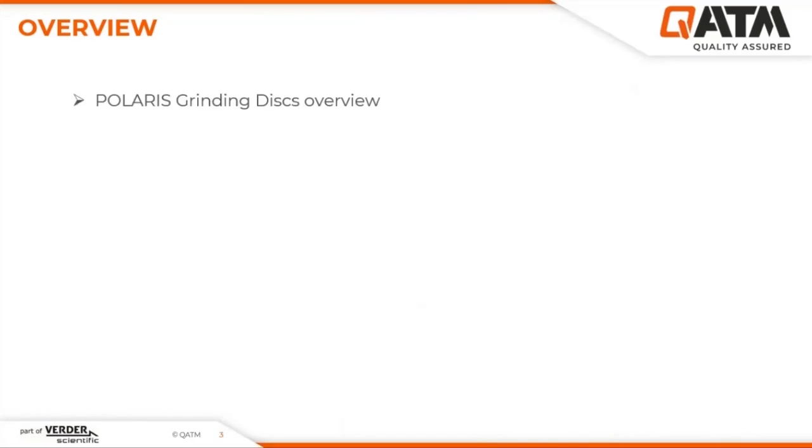After a short overview, I will talk about the Polaris grinding disks in more detail, about the composition, properties, and the application of the Polaris grinding disks. Afterwards, I will show you results of a case study and two preparation examples that we did in our ATM lab with the Polaris disks. And at the end, you will be given a short summary.

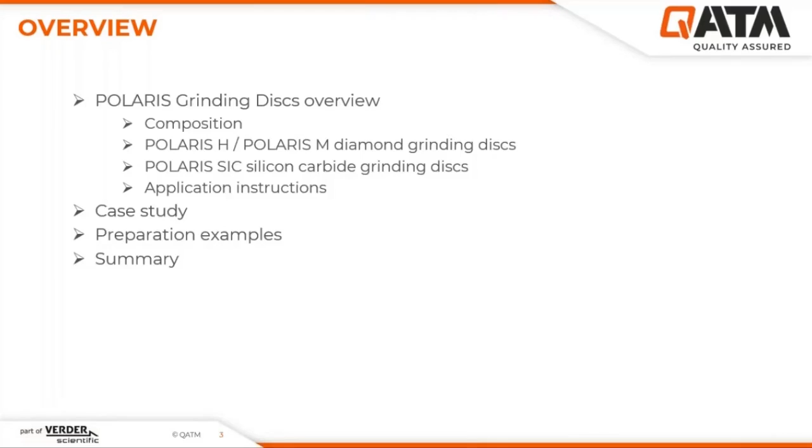As you know, we as new QATM are formed of the former companies ATM, located in Mammelzen, Germany, and QNESS, located in Golling, Austria, now acting together forming one company, QATM. That means that our product portfolio has also merged together.

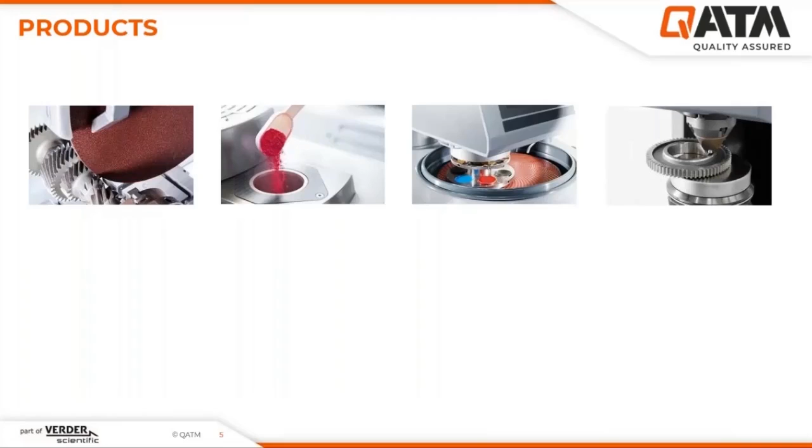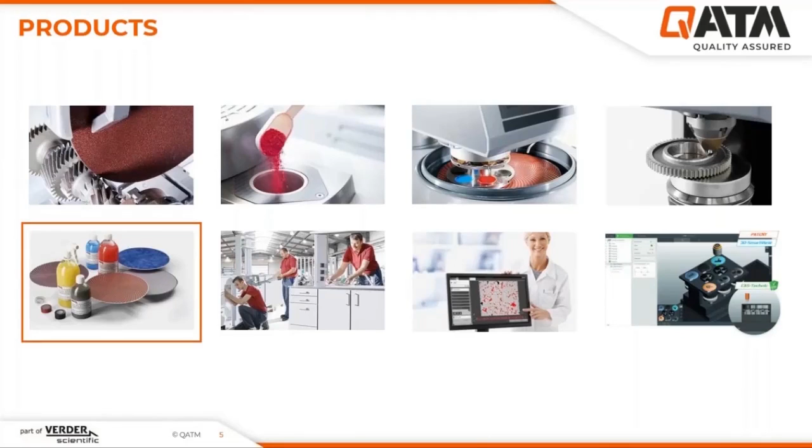Besides the machines for sectioning, mounting, grinding, and polishing, the hardness testers have been added. Then we have the consumables for all areas, lab furniture, and software for analysis. Now we will be looking at the grinding disc, which belongs to the grinding consumables.

I think most of you already know about the new grinding discs, and many of you have already had an introduction or have been working with some of them. So now there is a broad variety of grinding discs available for a broad variety of different materials.

One of the big advantages that grinding discs have compared to, for example, grinding paper is the rigid steel carrier, which allows the production of very flat samples with high edge sharpness. Additionally, no extra tools are needed to attach the grinding tool onto the working wheel. The high service life of the discs leads to a more environmentally friendly preparation method, since less waste is produced compared to grinding paper.

Today we will only talk about Polaris SiC, M, and H. These three discs have the same design but different properties. In principle, they differ in two things: abrasive and bonding.

Polaris M and H work with diamond abrasives, so they are diamond grinding discs and are usually used for materials that are harder than 300, 400 Vickers hardness. The diamond grain sizes are typically given in microns, and you can find this number on the front side in the middle of the disc.

The SiC grinding discs contain silicon carbide grains, and the grain sizes are given according to the FEPA standard, in the same way as silicon carbide grinding paper. Here again, you can find the grit number on the front side.

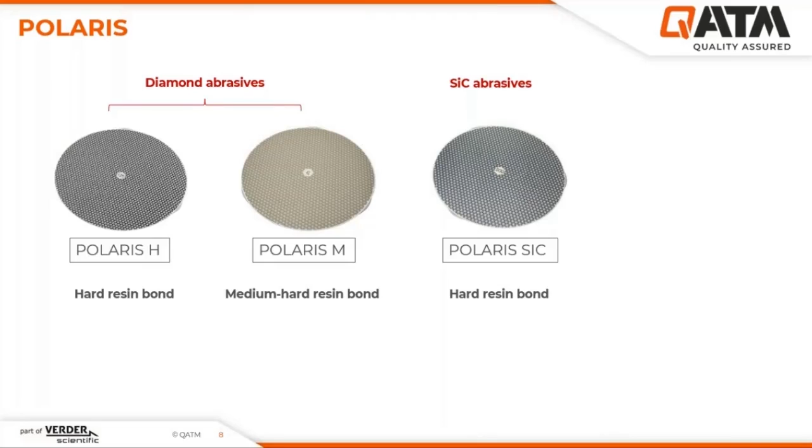The second thing that differs is the bond hardness. All three discs are resin bonded, but the hardness varies, which is realized by different hardening procedures, and this again influences the grinding behavior of the disc.

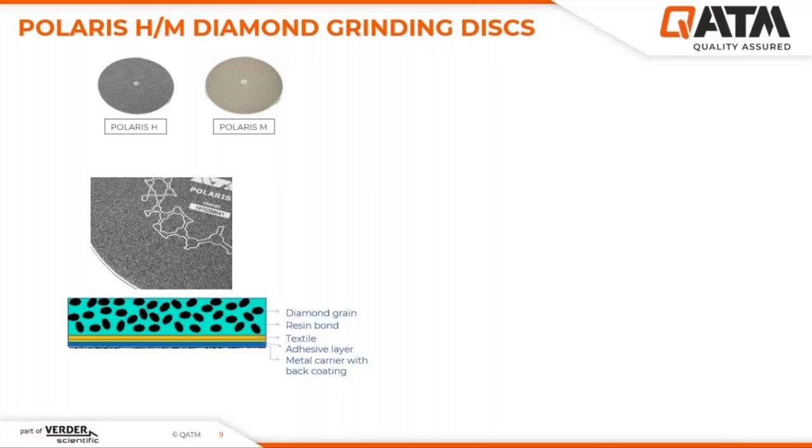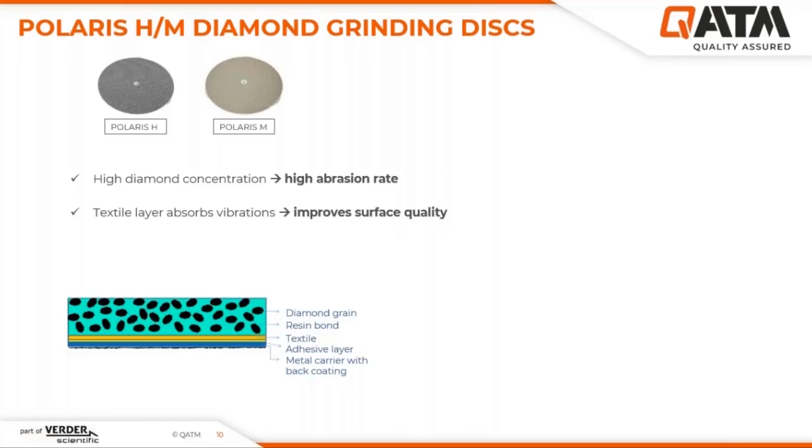The textile intermediate layer minimizes vibrations that arise during grinding and leads to an improvement in surface quality. Another property is the narrow grain size distribution of the diamonds. A special technology is used to achieve this narrow distribution.

This always applies: the narrower the grain size distribution, the better. If you have a broad distribution, you will have many oversized grains that will scratch your surface, and at the same time you also have many too-small grains that do not even take part in the grinding process. A narrow distribution means a high removal rate and good surface quality at the same time. So these are some important quality features that you should keep in mind.

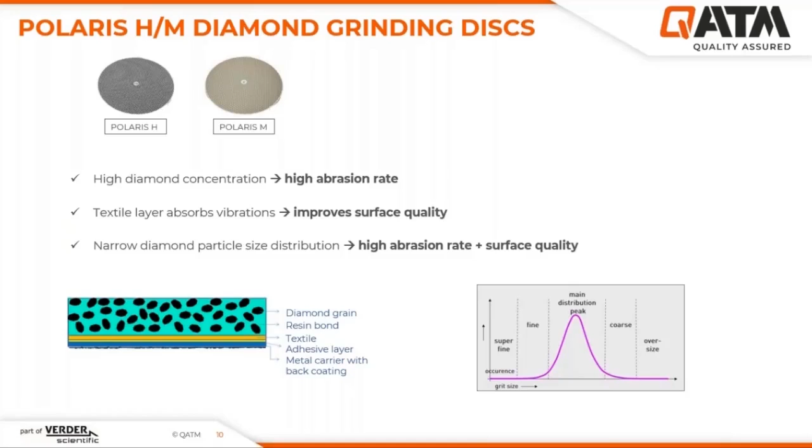As a rule of thumb, you can say that Polaris M is suitable for grinding medium hard materials, typically for medium hard metals or composite materials. For hard materials, however, Polaris H with a hard bond is more suitable, like fully hardened steel or materials with hard layers, ceramics, glass, or composite materials with hard components.

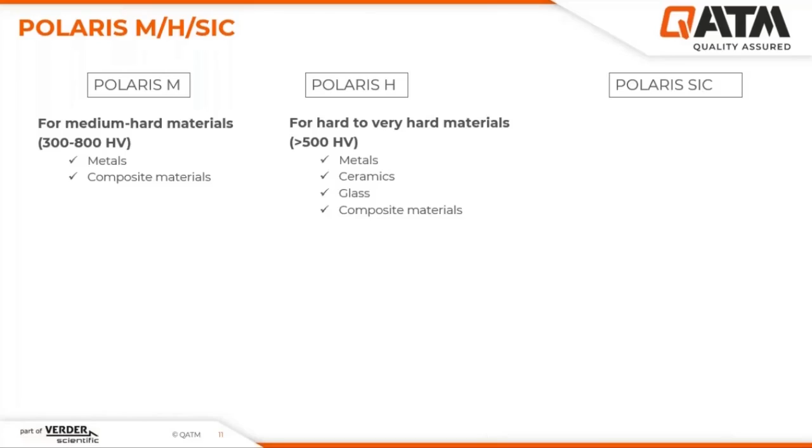The grinding discs are available in different grain sizes from 60 microns or 125 microns as the most coarse grain size down to a fine grain size of 3 microns. If you, let's say, grind with 4,000 grit paper, which is usually the finest grit, then this corresponds to a grain size of approximately 5 microns. So we get even a bit below that with the 3 microns.

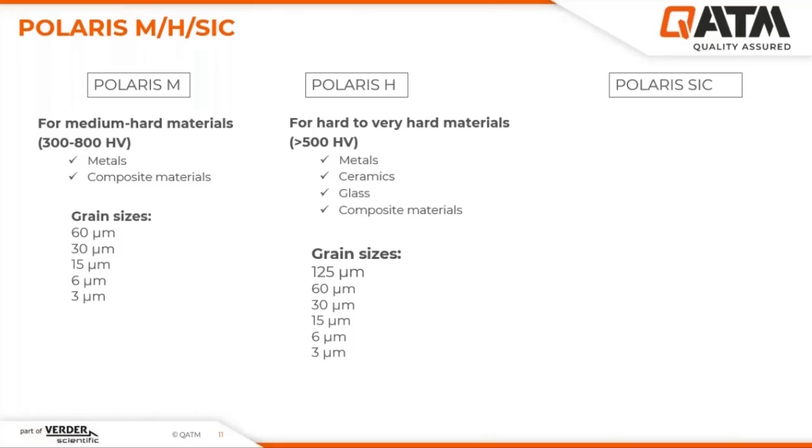The next step would usually be diamond polishing in a range from 15 microns down to 1 or 1/4 microns. So with grinding discs with grain sizes of 15 to 3 microns, we are already in the polishing area and can therefore replace polishing to a certain degree. Keep in mind that compared to polishing, grinding is always less effort. So that is an advantage, also in the sense of saving time and lowering costs.

Also, the environmental aspect should be mentioned here, because unlike polishing, you do not need any lubricant. The diamonds are used more efficiently and you produce less waste compared to grinding paper. Now let's look at the Polaris SiC discs. This one can be used for rather softer materials or materials that cannot or should not be ground with diamonds. The grit sizes range from 120 to 1,200.

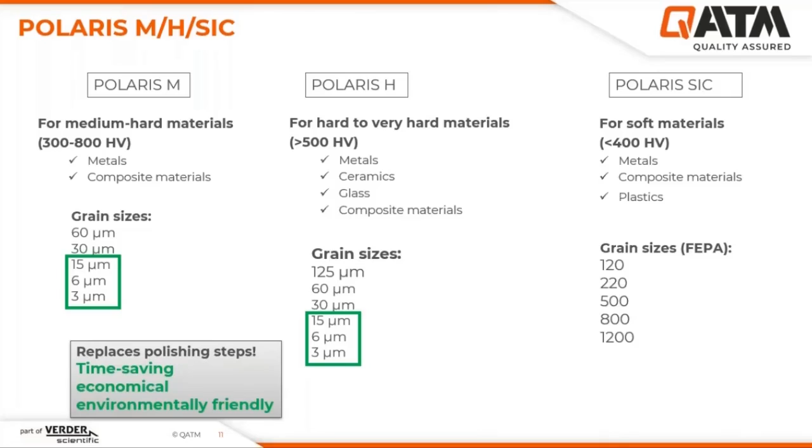The next slides will be about the application of the Polaris discs. In many cases, before applying a grinding disc for the first time, you have to dress it with a dressing stone, which is typically an aluminum oxide or silicon carbide stick. But this pre-dressing is not necessary for the Polaris discs. They can be directly applied, so you are saving a working step here.

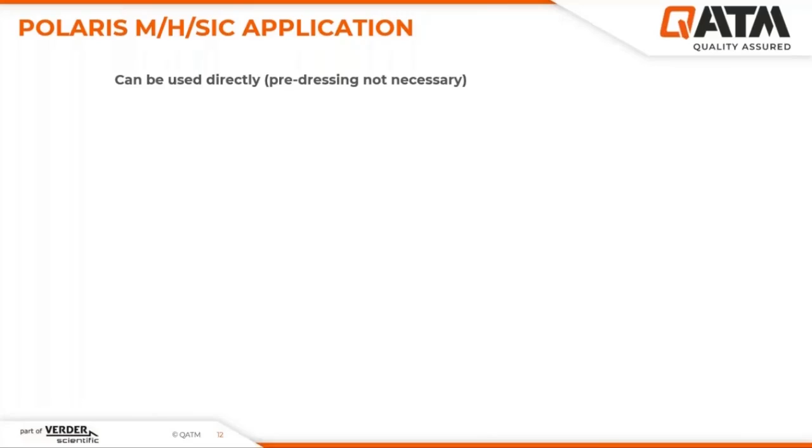There are some things that I would like to point out. As for every consumable, the correct handling is very important to assure the quality and service life of the tool. These are the main points to be taken care of. So in the beginning, please always ask these questions. Do I have the right disc for my material? Are they embedded in resin or not? Is the water cooling sufficient? Have I chosen the correct parameters like force or rotation speed, and so on?

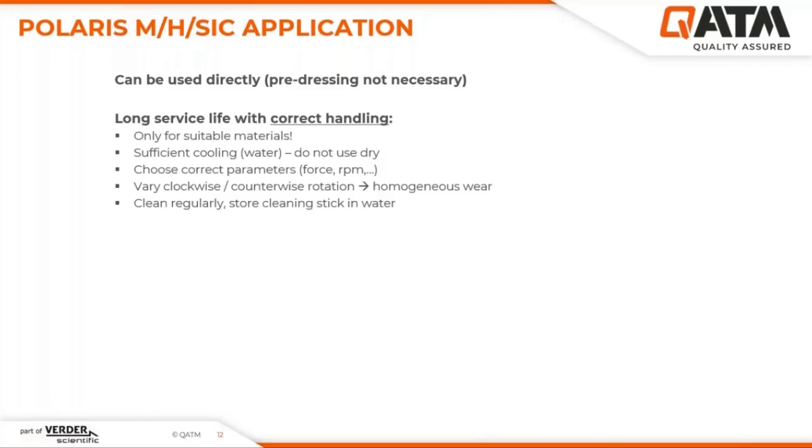In order to gain a more homogeneous wear, it's recommended to vary the rotation direction from time to time. Also clean the discs regularly, since a smeared disc will not work as sufficiently as a clean one. So if you have taken care of all that and you have good conditions and, let's say, an advantageous material, we can roughly estimate a tool life compared to approximately 1,000 grinding papers for the diamond grinding discs. I will give you an example on that shortly after. And of approximately 100 grinding papers for Polaris silicon carbide.

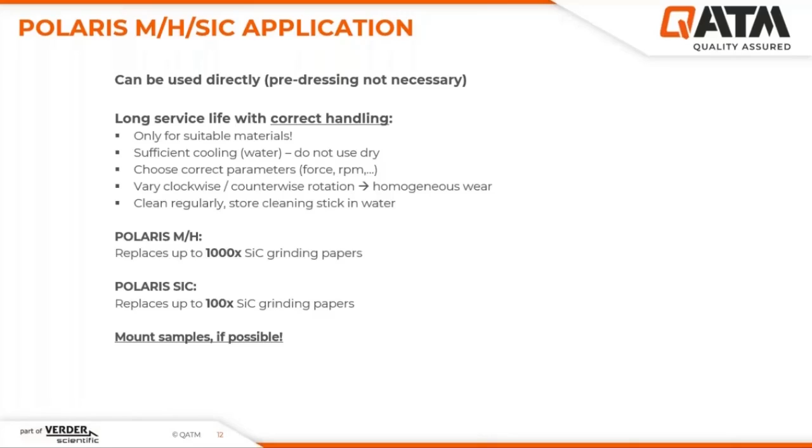I would always recommend, if you have the possibility to mount your samples, please always do that. This way, the probability of damaging the discs by canting is minimized a lot. Then I mentioned that it's important to clean the discs regularly with a nylon brush, of course, but also with the cleaning stick in case of smearing. This cleaning stick is also made out of aluminum oxide with a relatively low hardness. This stone should be stored in water at least 10 minutes prior to use to have a good cleaning effect, because it takes up a lot of water.

An indicator that the surface of the disc is smeared is when it appears shiny metallic, which happens fast if your material is a ductile metal. Also, your polymer resin can smear the surface. And the next indicator is when your disc is not worn out but just doesn't seem to do its job anymore. The abrasion rate decreases a lot and you need a lot longer to finish your step. So if that happens, use the cleaning stick to remove the smeared layer so the abrasives are at the surface again and do their job.

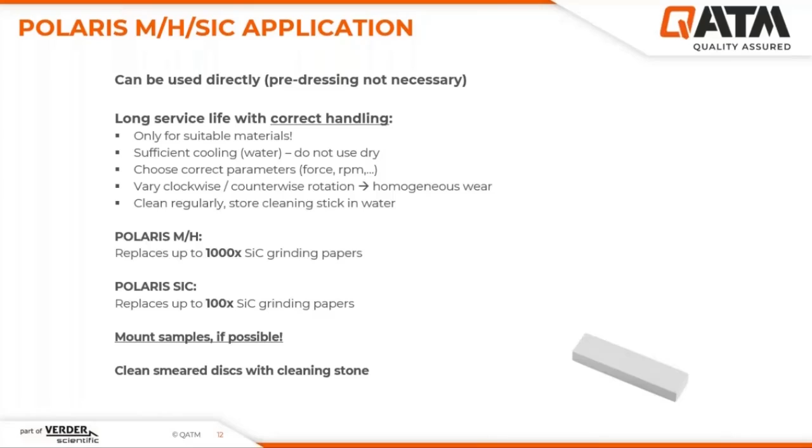So let's see, next slide. So the cleaning procedure is a kind of dressing of the uppermost layer. You first have to turn on the water cooling and the working disc. Then take the cleaning stone, which you have kept in clean water, in both hands, and bring one edge into contact with the rotating disc with a controlled even pressure.

While cleaning, there will be a grinding noise. And be sure that you move the stone over the entire radius of the disc so that the disc is cleaned evenly and is conditioned. Do this as long as necessary. Normally, a minute should be enough. You will then notice wear of the cleaning stone, which is totally normal.

And with one stone, you can do several cleaning operations, and you can, of course, reorder this cleaning stone if needed. After the process, you can rinse the stone and the disc and put the stone back in the water if you want. We here at QATM just store the stone in the water the whole time.

Here you can see microscopic images of the surface of a grinding segment. In the left picture, you can see a disc with large parts clogged. After cleaning with a nylon brush, there is no real improvement. Only after you have used the stone, you will see that almost the entire surface is free again.

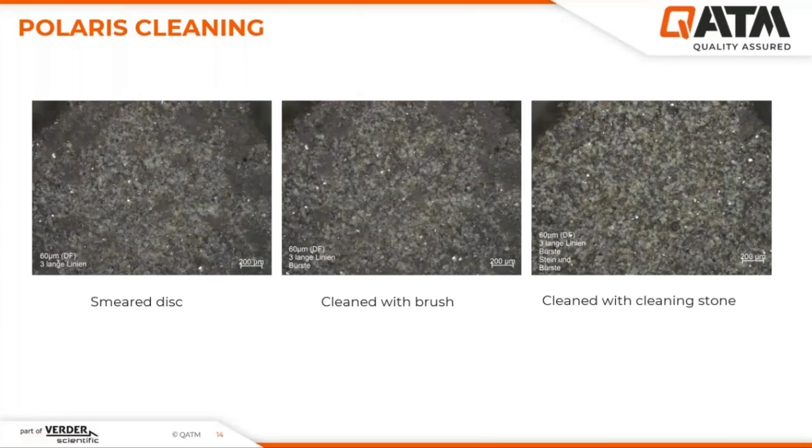So the stone must be used as soon as you notice that the disc is clogged and no longer working properly. Now I will talk about a case study that was conducted with the Polaris H, where HVOF layers were prepared under real conditions with Polaris H discs in the grain sizes 60 microns and 15 microns. They used full sample holders with 6 embedded samples, and the removal rate and the tool life was measured.

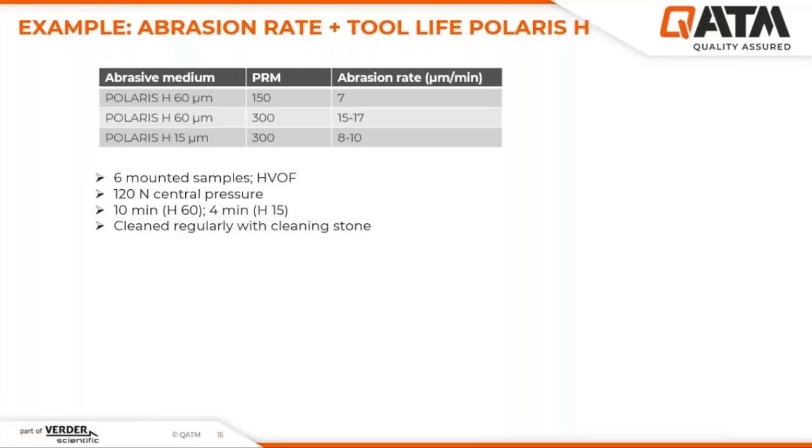It could be observed that the same disk removes about twice as much at a rotation speed that is twice as high, so the removal rate is more or less proportional to the rotation speed. Of course, the finer the grain size, the lower is the removal rate. According to the protocol, the 60 micron disk had a total operating time of 50 hours and was still fully operational afterwards. During the study, it was regularly cleaned with the cleaning stone.

Here you see a picture of a grinding segment before and after the 50 hours operating time. You can see how the thickness of the segment has decreased significantly. So assuming a disk can operate for 50 hours, which is 3,000 minutes, and if you assume that a grinding paper is used for, let's say, 2 minutes, we would need 1,500 papers for the 50 hours.

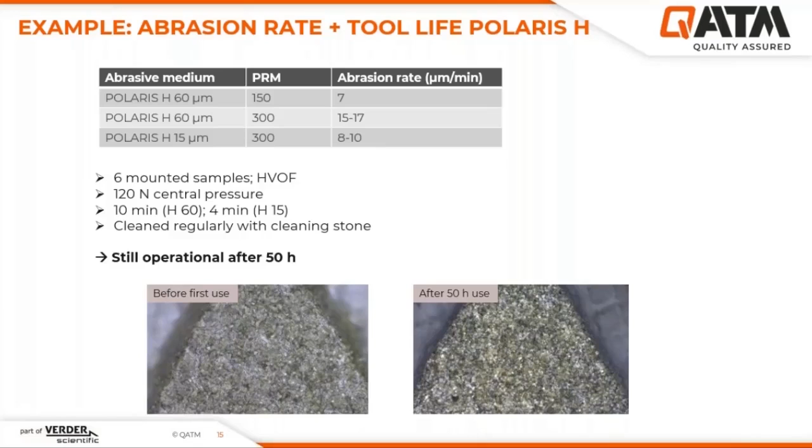So in this case, the Polaris H disk with 60 micron diamond grains could replace more than 1,500 silicon carbide grinding papers. With this method, the results were very satisfactory and the layers didn't break out. Therefore, it is possible to develop alternative methods to conventional grinding paper preparations.

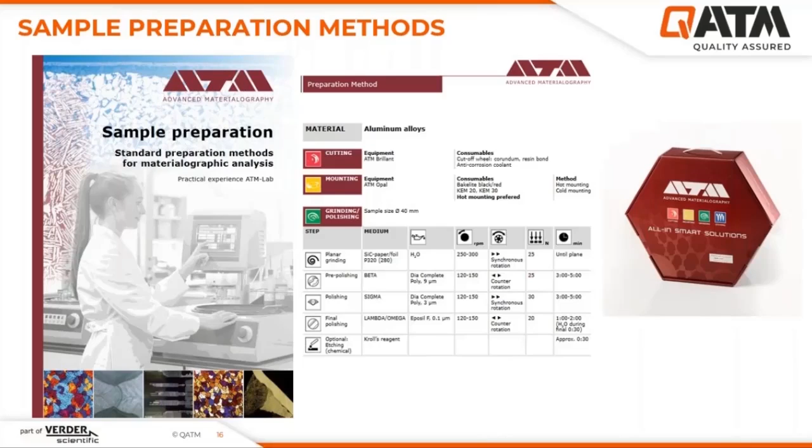And that is great because, as you know, we offer solutions for material preparation, which includes preparation instructions and guides in form of these booklets, or can be also found in our solution boxes. Well, so far the preparation methods are mostly preparations with a grinding paper, but we want to use the new possibilities that we have now to develop new preparation methods with the Polaris grinding discs. In order to do that, we have to test these new methods in our preparation lab.

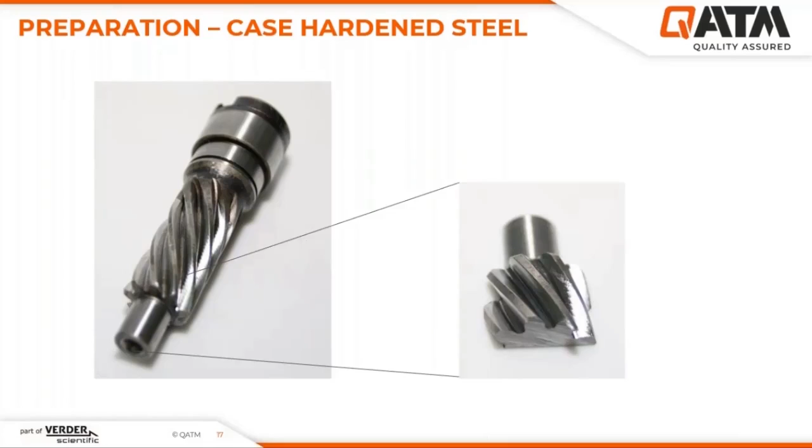So one of the materials that I started with was case hardened steel using a piece of pinion shaft as sample mounted in EPO black. This is how the standard preparation looks like. The first step would be grinding with conventional grinding paper grit 320, then diamond polishing on beta with a 9 micron suspension for 5 minutes, and then on delta with a 3 micron suspension for 6 minutes.

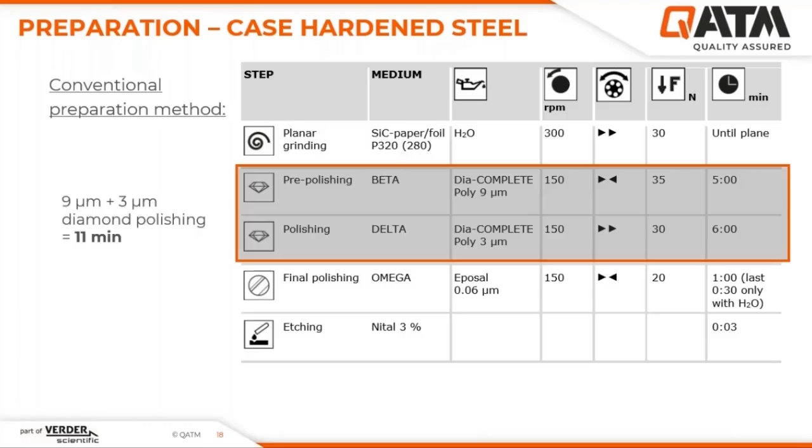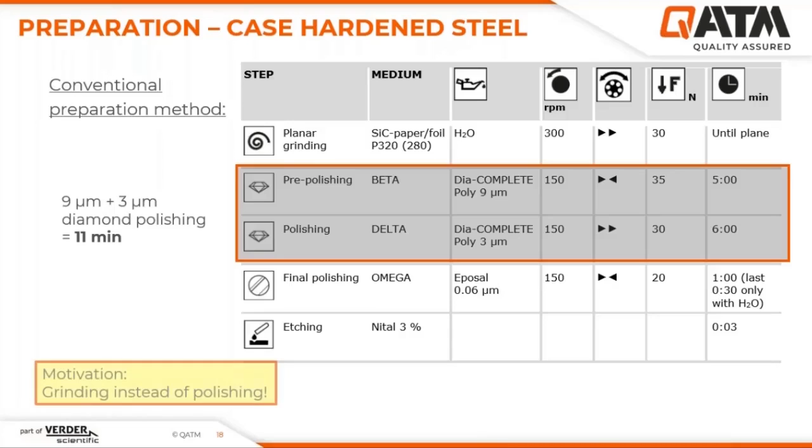After that, we do final polishing with eposal on the omega cloth, and at the end, etching to visualize the microstructure of the sample. If you add the two diamond polishing steps together, the time that is needed only for diamond polishing is 11 minutes. And here we see a big potential to save some time by grinding instead of polishing. Now, based on this motivation, I created a new preparation method. This is what it looks like.

I chose Polaris M as the grinding disc and did all the grinding steps with Polaris M. In principle, you could also switch between different discs if the material allows it. So you could start with Polaris H for the coarse grits and continue with the M disc for finer grits. But yeah, I've now done all the grinding steps with M, replacing the 9 micron diamond polishing step with a 15 micron grinding disc and the 3 micron diamond polishing step with the 3 micron Polaris M grinding disc.

The grinding time was 3 minutes each, so it would be a total of 6 minutes preparation time instead of 11 minutes. I also replaced the 320 grit paper surface grinding step with Polaris M 30 microns. In this case, planar grinding took about 2 minutes. The additional advantage here is that you get very good flatness and edge sharpness due to the hard steel base. If you use foiled grinding paper and standard adhesive carrier, for example, then the surfaces are often rounded off because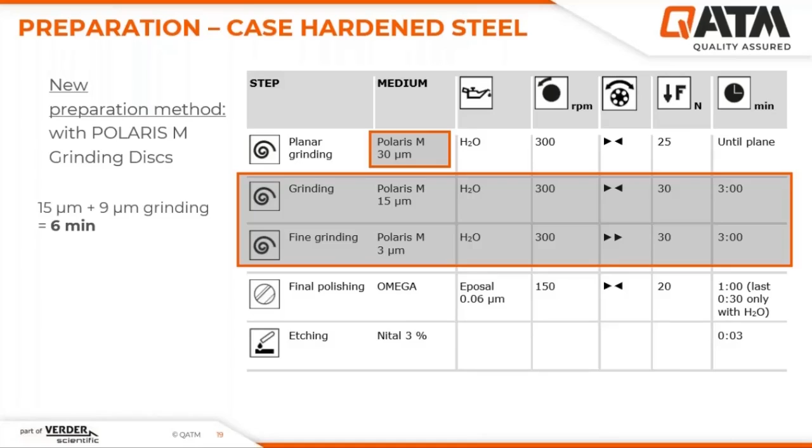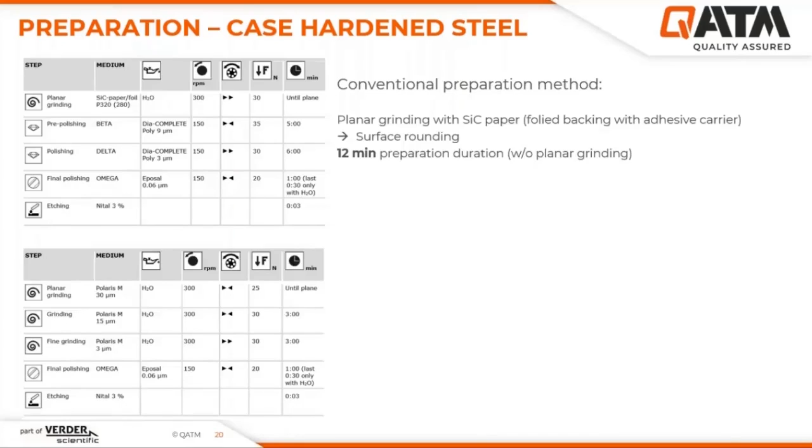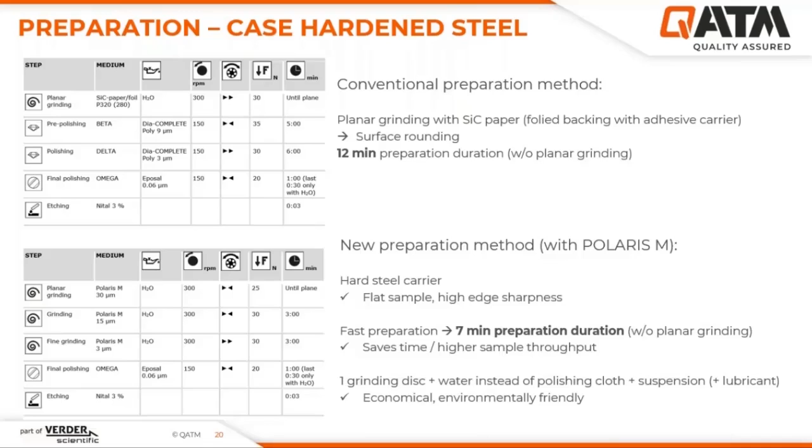of the soft layer. And after the 3 micron grinding step, I continued as usual with final polishing with eposal and omega. In summary, there are several advantages with the new preparation method. In addition to the good flatness, the preparation time is shorter. We need 7 minutes in total instead of 12 minutes, so the sample throughput can be increased within the same time, and less consumables are required by replacing the 2 diamond polishing steps with grinding steps. Also, replacing the paper produces less waste in the long run. It is also more cost effective.

So now a few pictures. Here you see micrographs of the surface produced with the conventional method. In the first picture on the very left, after 9 micron polishing on the beta cloth. In the next picture, after 3 micron polishing on the delta cloth, and on the very right, after final polishing with Eposal on the omega cloth.

In comparison, you can see the micrograph on the left here after grinding on Polaris M with 15 microns. Of course, you will see a significantly coarser pattern as 15 micron abrasives are used instead of 9 microns, and also we have bonded abrasive grains here, which also affects the grinding pattern.

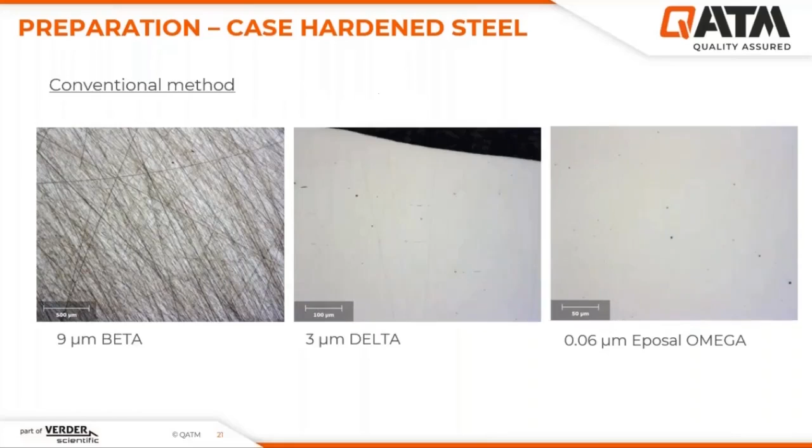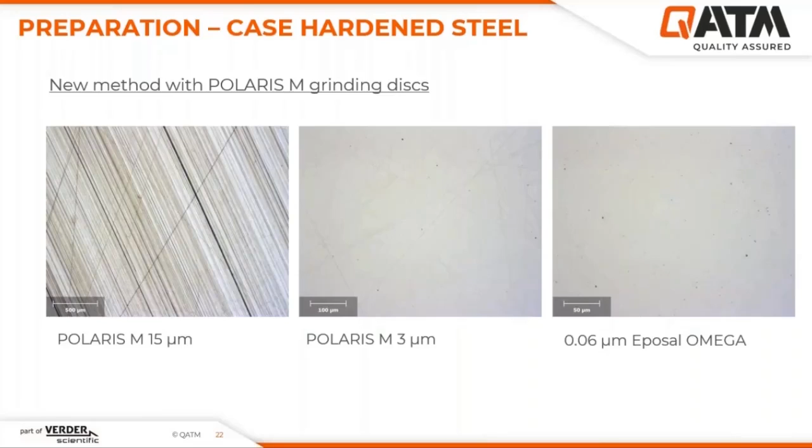In the middle, we have the 3 micron step again, this time with the Polaris disc. And if you compare with the 3 micron diamond polishing in the previous slide, you can see that there is no really significant difference here. In the third picture on the right, you can see the result after fine polishing with Eposal for 1 minute, so the same as before. And directly compared, the results after final polishing are really just the same.

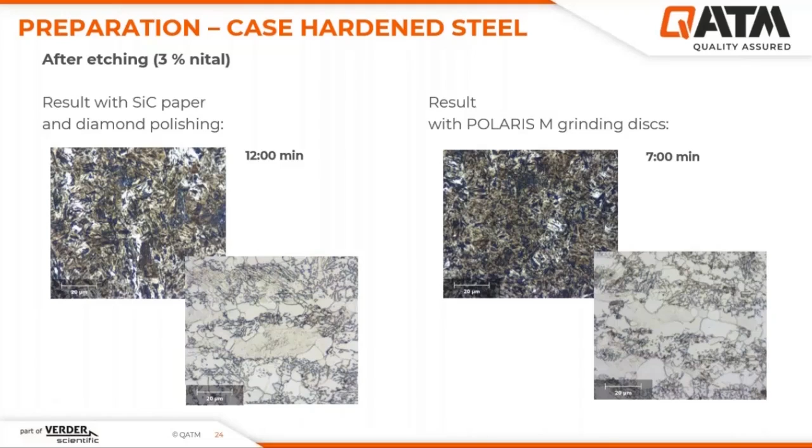I then etched the samples, and you can see the result here. In both cases, the microstructures are clearly visible, the martensitic structure in the outer area and the original structure in the inner area of the sample. So with the new method, we can achieve a very good preparation result and on top save 5 minutes of preparation time.

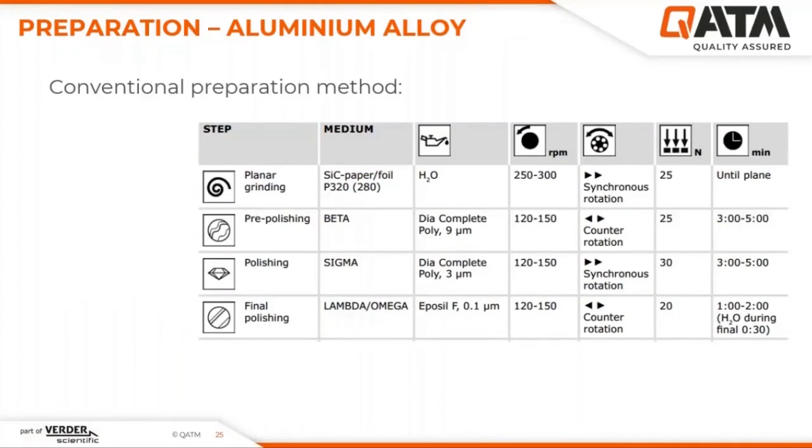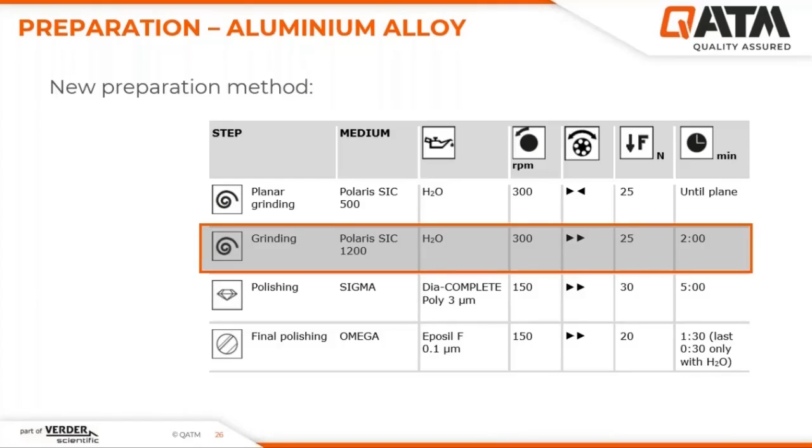Another material that we prepared was aluminum alloy. This is the conventional method, and in order to save time again, we replaced the pre-polishing step with the Polaris silicon carbide disc, grit 1200. Also, the planar grinding step was replaced by Polaris 500 to get a better flatness.

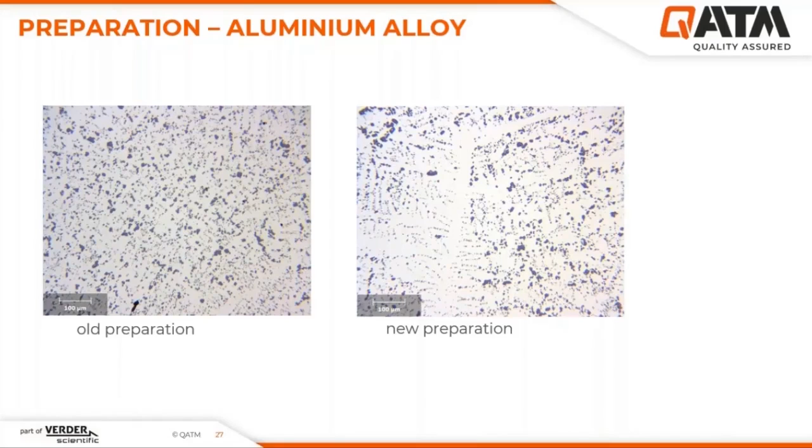The results show again, although in the second picture the brightness setting was maybe a little bit too high, that the new preparation method with grinding discs is first of all replacing the grinding paper in a good way, and second of all replacing a polishing step, and it works for this material as well.

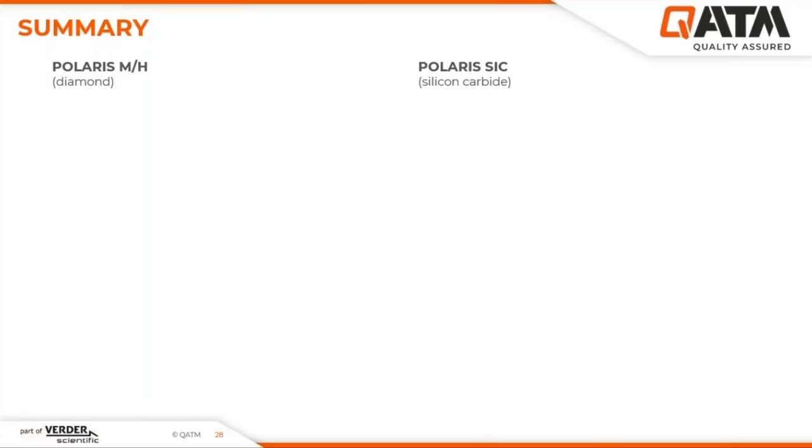Now we are slowly coming to the end of the webinar with a summary. You saw that it is possible to optimize preparations with the Polaris grinding discs. Of course, they are not a universal solution to all problems, but in many cases, they offer a great potential. The most important points that apply to both the diamond and silicon carbide discs are a high level of flatness and edge sharpness of the samples, which is achieved by the hard steel base.

This steel base also enables the use on magnetic working wheels without additional tools, and the rough coating on the back of the discs enhances the grip, preventing the disc from sliding sideways. In addition, grinding discs are more environmentally friendly compared to the conventional methods with grinding paper.

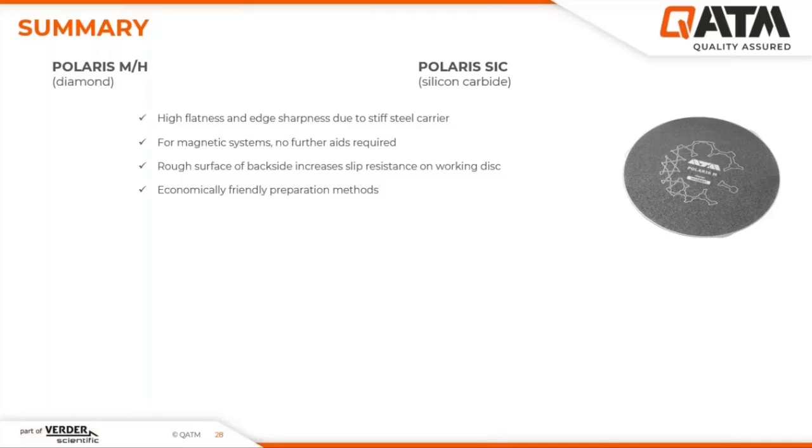The Polaris M and H diamond discs are also available with very fine grains down to 3 microns, as you saw, which means that polishing steps can be replaced, and it can save time and money. And the high diamond concentration and narrow grain size distribution are quality features that lead to an increased removal rate and surface quality, and also to a long service life.

The height of the grinding segments is 0.4 millimeters, and all discs are available in the diameters 200, 250, and 300 millimeters for the available grinding and polishing machines, and in 350 millimeters for the new Q-Pol XL, which will be released soon. Now that brings us to the end of the webinar.